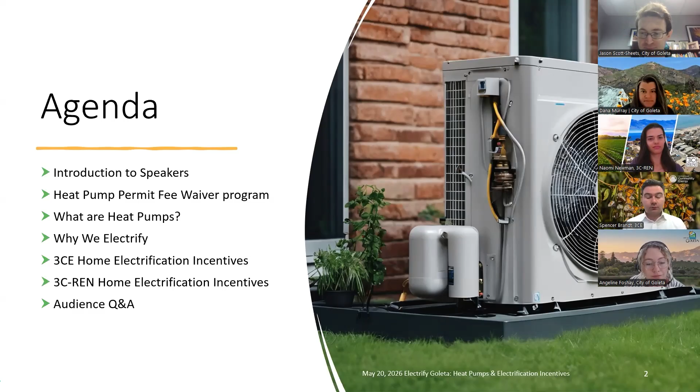Speaking of our speakers, we'll take a moment to introduce them now, starting with myself. Once again, my name is Jason Scott Sheets, and I'm the Civic Spark Sustainability Fellow working with the City of Goleta's sustainability team. I'll be speaking about our new heat pump permitting program, the technology behind heat pump devices, and why we're working to support and encourage electrification in our city.

I'm joined by two colleagues representing our local partners in electrification. Spencer Brandt is a community relations manager with Central Coast Community Energy, or 3CE, which is the not-for-profit public agency that serves as the default electricity provider for customers in the city of Goleta. Naomi Neiman is the climate and energy program specialist with the Tri-County Regional Energy Network, or 3C-REN. You'll learn more about them, their organizations, and the great opportunities they can offer to help Goletans electrify later in the program. I'm also joined by my colleagues on Goleta's sustainability team, Dana Murray, our sustainability manager, and Angeline Foshay, our sustainability analyst. We appreciate your support in pulling all of this together.

With that said, we can begin our program, starting with a local update. I'm pleased to announce that the City of Goleta has officially launched our new heat pump permit fee waiver program. This policy is intended to encourage and support home electrification by reducing existing financial barriers to accessing relevant technology. In this program, a permit application for projects installing electric heat pump water heaters and heat pump heating, ventilation, and air conditioning (HVAC) systems are eligible to waive the fees they would normally pay for those permits.

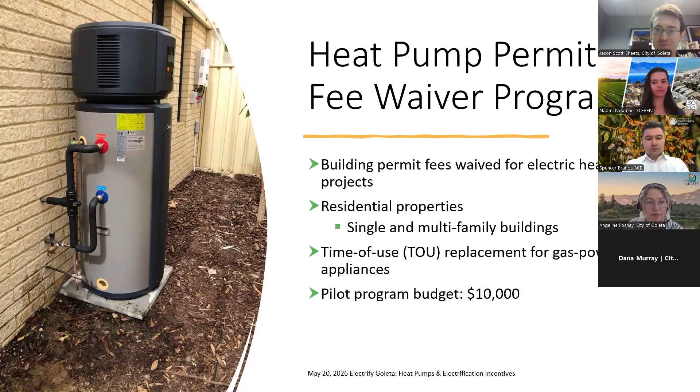Now, it may be that not everyone is familiar with heat pumps and the technology behind them. So what exactly are they? Put simply, a heat pump is a device designed to move heat around in order to heat water or space, rather than generating heat as many standard appliances have done for decades. Heat pumps are experiencing a recent surge in popularity and interest.

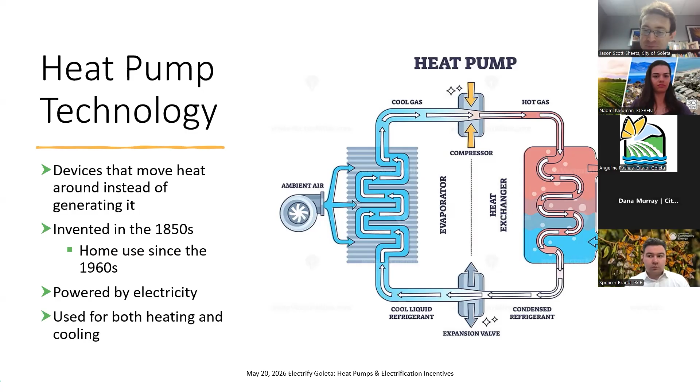This technological approach has a few advantages. Most notable is the jump in efficiency for a heat pump versus a traditional heating appliance. Simply speaking, efficiency measures how much energy is put into a system and how much comes out. When you consume fuel or generate electricity for heating, some efficiency is lost in that process. Take a gas furnace for example, which will typically achieve an efficiency rating between 80 to 98%.

But because a heat pump moves heat around instead of generating it, it requires less energy input to achieve its outcomes. This enables heat pump HVAC systems to commonly achieve efficiency ratings between 100 and 300%, using 1 unit of energy to get 1, 2, or even 3 units of heat back.

They also happen to be safer than gas-powered appliances. Because they use electricity instead of gas or fuel, they remove the risks associated with gas leaks, combustion, or open flame hazards. They're also ideally suited for warmer climates, which Goleta happens to have, because they move heat from indoors to outdoors and vice versa. The closer those areas are in temperature, the quicker the heat pump is able to do its job.

Heat pumps are also able to improve the comfort and quality of your home and air. By removing the fuel combustion element, they remove contamination risks from carbon monoxide and nitrogen dioxide. Most heat pump models will also feature strong filters capable of capturing a lot of dust, pollen, dander, spores, etc. Their more constant air circulation also reduces stagnation in local air, and they've been found to outperform standard central air conditioning in regulating and managing humidity. When installed properly, they're also capable of enjoying a longer lifespan and lower maintenance costs than many other devices.

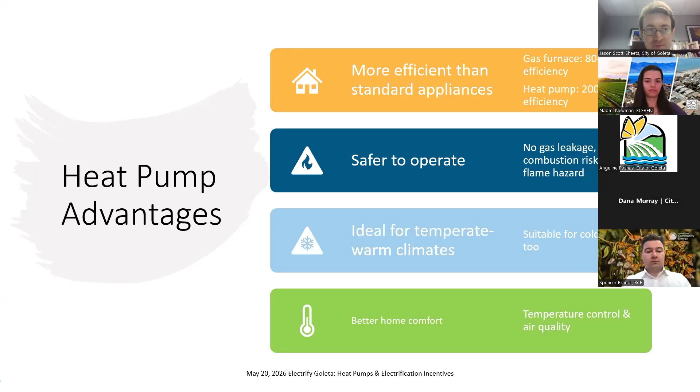So specifically speaking, how do heat pumps function versus classic systems? We'll first look at a water heater, commonly powered by gas or electricity. A standard electric tank water heater, for example, uses electricity to warm an element within the tank that directly heats the water. It's a simple and straightforward process, contributing to a simple and less expensive installation cost, but it's also not fully efficient.

An electric tank water heater will typically score from 90 to 95% efficiency, while a tankless electric can do better, usually around 98 or even 99%.

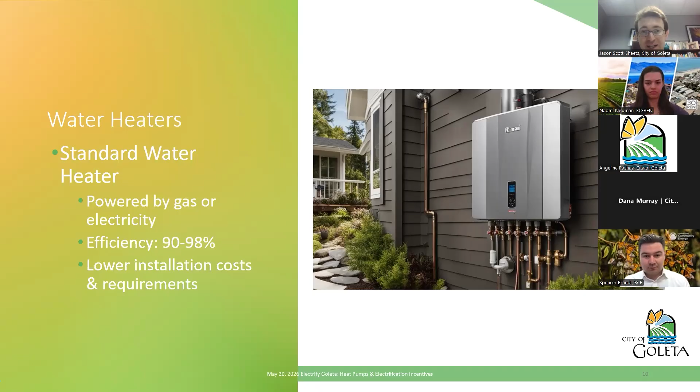The heat pump, by comparison, employs its heat movement approach to pull warm air in, using that air to turn its refrigerant into a heated gas, which is compressed around the water tank to transfer heat into the water until the refrigerant is cool and returns to liquid, and the cycle repeats itself. The whole process is powered by electricity, and the standard heat pump water heater can reach efficiency levels ranging anywhere from 200 to 350%.

This efficiency level also creates greater energy savings, as it requires much less energy consumption to achieve its desired results. That tends to offset any higher installation costs that involve more requirements to complete it.

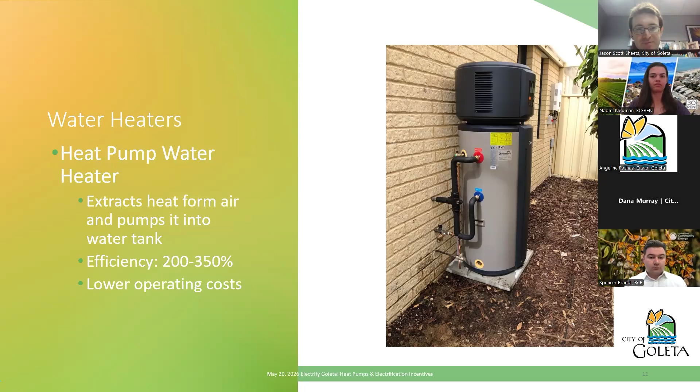Additionally, we have a heat pump compared to a classic heating or cooling appliance. What's the difference? The big difference is the function. Both a standard AC unit and a furnace each perform one service, either heating or cooling. Many furnace systems run on gas, while AC units commonly use electricity. Like a standard water heater, a gas furnace uses energy to create heat, which is simple, but loses out on some efficiency.

An AC unit actually operates very similarly to a heat pump in its cooling function, but it can't effectively perform heating without a partnered furnace unit. A heat pump HVAC system, on the other hand, is able to perform both cooling and heating on its own, moving warm air indoors or outdoors as needed.

It also performs significantly more efficiently than a gas-powered furnace, as we've touched on. While it and AC units perform comparably in a warm climate, its utility really stands out in the ability to perform heating when necessary, at efficiency levels that generate significantly more savings on energy usage.

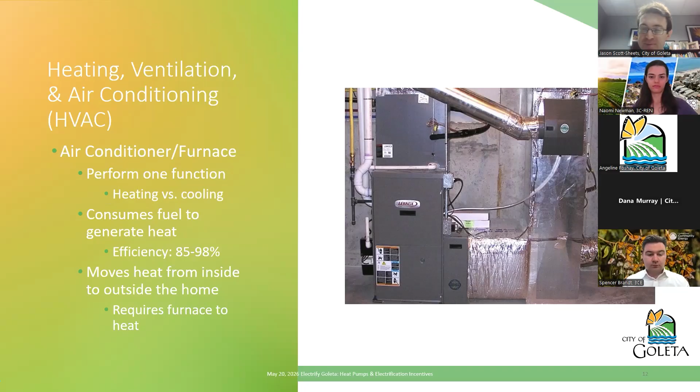Now, against the advantages a heat pump offers, one of the main considerations to weigh is something mentioned a couple of times already: upfront cost. This is represented by a combination of the device's cost plus the cost for installation.

Around Goleta, the cost of a heat pump water heater can range between $1,500 and $3,000. For an HVAC device, a ductless one, which doesn't require ductwork in the home to operate, can cost between $500 and $1,800, which can change depending on how many rooms and units you want to incorporate in the system. A ducted system can range from $4,200 up to around $7,600.

Heat pumps also face higher installation costs due to potential needs for upgraded electrical wiring, and space requirements that may complicate installation. Due to their size, there may be fewer options for where you can locate them, as well as the potential need for new refrigerant lines or possibly upgraded or installed ducting. The labor for installation is then added on to that.

Now, while upfront costs may be higher for these devices, it's counterweighted by the energy savings created by the heat pump's efficiency, which lets them operate while consuming a lot less power than their competition. The fact that Goleta's climate is nearly optimal for heat pump functions further maximizes their performance and the benefits you get. Coming up in the program, you'll also learn about a few more opportunities available to reduce the costs involved with installing heat pump devices.

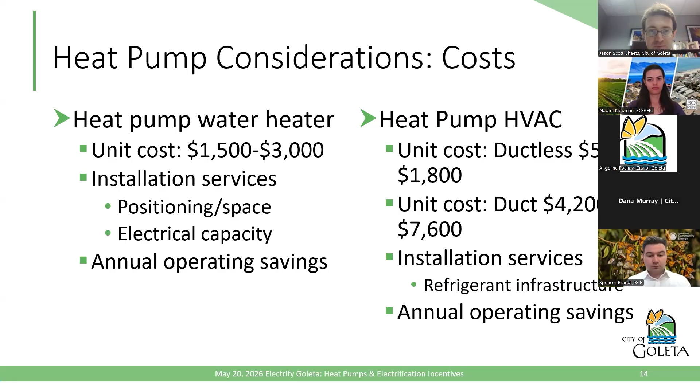One of the most important factors in maximizing the benefits of a heat pump system is a proper and successful installation process. The features of homes and heat pumps can both vary significantly. The nature of your home is really important in determining what type of heat pump will work best for you. Do you need a ducted appliance or a ductless mini split? And are you looking for a single or multi-zone system?

Moreover, the recency of heat pump popularity means not all contractors have the experience or knowledge yet to expertly install them. If you're going to get a heat pump, it's really important to find a qualified contractor for the job, someone who can correctly execute the technical requirements of installation, but also explain and plan with you for maintenance, and ensure you're fully informed about the performance, efficiency capabilities, and safety factors of the model you've chosen.

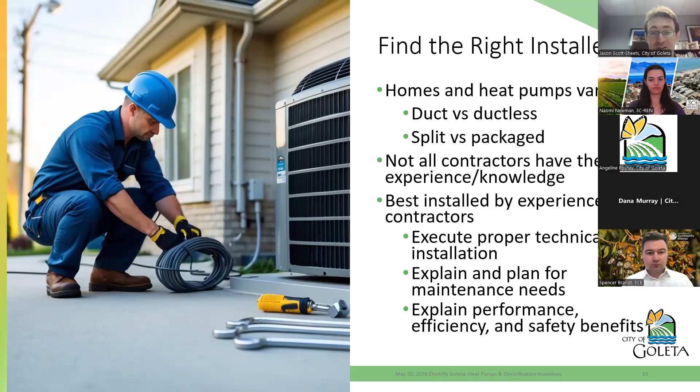There are a few resources available to help you find the right contractor. The Switch Is On is a free online database specifically for people who live in California, which can identify contractors experienced with heat pumps who operate in and around your zip code or city. Another database with nationwide coverage is run by Rewiring America, which you can cross-reference with The Switch Is On results to further inform your search if you want.

Later on in our program, you'll also learn about how 3C-REN's concierge energy services can help you with your particular electrification project specifically. As you search for contractors, you should obtain quotes and estimates from a few different options. You should check out their profiles and websites to gauge their experience and knowledge of heat pumps conceptually, because the better qualified the contractor you hire, the more beneficial your heat pump installation will end up being.

A really key part of that process is to ask the right questions. You want to ensure that both you and your contractor understand the device you've chosen and the expected outcome and performance once it's operational.

These include questions about logistics. For example, where will the outside unit be placed and how noisy will it be? Does the placement account for that factor? How capable is this unit meant to be with cold conditions? What are its efficiency ratings? Will the electrical panel need to be upgraded to accommodate the device?

So heat pumps are an important part of Goleta's efforts to advance electrification in our communities. Why exactly is electrification a significant goal for the city?

Well, one big reason is the current public policy priorities at both the state and local levels in California. Several recent policy developments have moved significantly towards encouraging or even mandating building decarbonization involving heat pumps in the state. Building decarbonization refers to the reduction of greenhouse gases emitted by buildings during their construction and operation. For example, the California Energy Commission's 2025 Energy Code established energy performance requirements that made heat pumps the effective standard for compliance in new home construction. The related compliance manuals back that up, providing guidance leading towards heat pumps for nearly all contexts in single-family residential buildings. There's also a possibility, though unconfirmed, that the California Air Resources Board may consider sometime in the next few years regulations that will require heating appliances to be replaced with zero-emission devices.

So Goleta is introducing its heat pump program to align with the general trend of building regulations at higher levels, and it's meant to start guiding residents towards where they may be required to be, not too far in the future.

Electrification is also a main policy focus for the city of Goleta itself, and it's been highlighted in several of the city's major policies and guiding documents. The city's strategic energy plan, for instance, prioritizes transitioning to renewable energy and boosting energy efficiency. The Planning and Environmental Review Department's annual work program includes electrification as a major initiative for community planning. And the city has recently enacted new REACH codes related to energy performance and EVs, intended to continue incentivizing improved energy efficiency and methods for replacing fossil fuel-powered devices with electric alternatives.

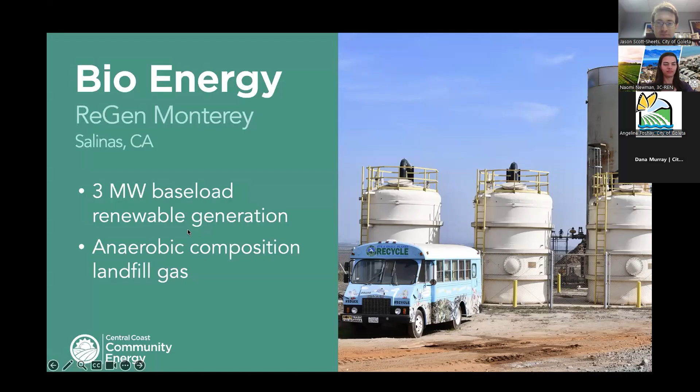Now, what you've all been waiting for, I want to talk about some of the rebates that we offer to our customers. First, our most popular program, Electrify Your Ride. We offer rebates between $500 and $3,500 for the purchase of a qualifying battery electric vehicle. If you're income qualified, plug-in hybrid vehicles are also eligible. This program is available for used electric vehicles as well as new ones.

And here's how it works. You purchase your vehicle, you submit your application through our website. Purchases made between August 1st of last year and September 30th of this year can be submitted by the September 30th deadline this year to be eligible for the rebate.

Once you have your EV, you may want a charger at home, and we can help with that too. We offer $3,000 to offset the cost of EV charger equipment and installation. This is a separate rebate from the vehicle rebate, and you can apply for both together or independently in any order that you choose.

We also offer what's called an EV readiness rebate, which covers pre-wiring for your home for EV charger installation. This program funds level 2 chargers that are either hardwired or designed to plug into a 240 volt outlet. So, like the vehicle rebate, you complete this purchase ahead of time, install it first, and then gather your documentation and submit the application at our website, 3ce.org.

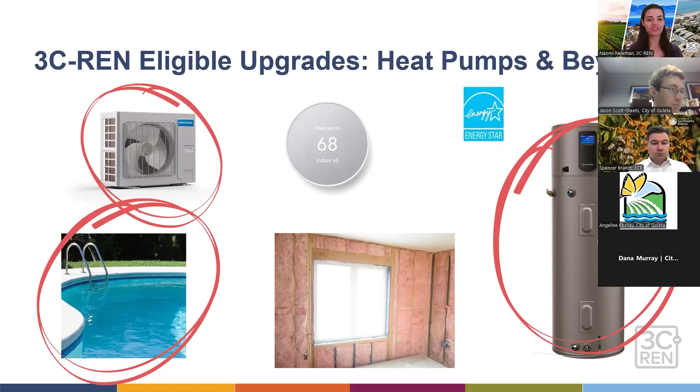Because our program focuses on saving energy, there's a lot of opportunities you can use to get incentives besides just heat pumps or hot water heaters. Anything that saves energy, including upgrading your windows, adding insulation, pool heat pumps, even a smart thermostat. So really anything like that — we want to encourage you to think outside the box. There's a lot of great opportunities to take advantage of our program besides just these larger projects.

I also wanted to clarify that we have a different equity criteria for Ventura versus Santa Barbara, so make sure you're looking at the Santa Barbara one to see if you're eligible.

This is a new program we're partnering on with the County of Ventura that's really exciting. It's called 3C Beach, and it's basically a program to get a better understanding of how electrification improves the comfort and air quality of a home. It's a pilot program where families who join agree to have their homes monitored for 9 to 12 months before and after getting upgrades — this is air quality monitoring inside and outside the home. You get free upgrades, including things like a heat pump water heater and induction, and by collecting this data throughout the year we can get a better understanding of the additional benefits, like Jason mentioned, and get quantitative results we can use.